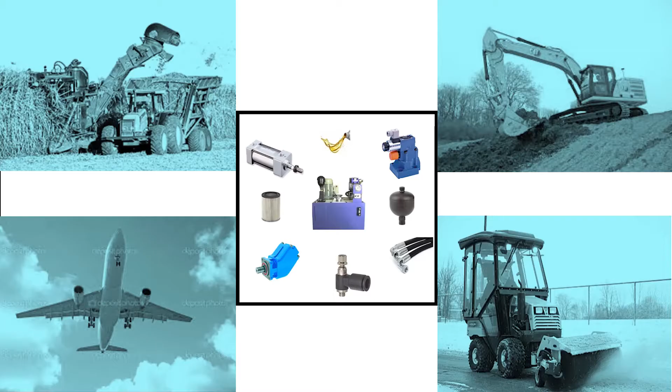Next we will see how the fluid is transported. In the previous topic, external meshing took place. Now we will see internal meshing, what is called the internal gear pump, commercially available in the market. Let's see how the fluid is sucked and transported to the hydraulic system through various valves. Again, inlet is there, outlet is there, some mating elements are there. Can you please see here how it is, what are those?

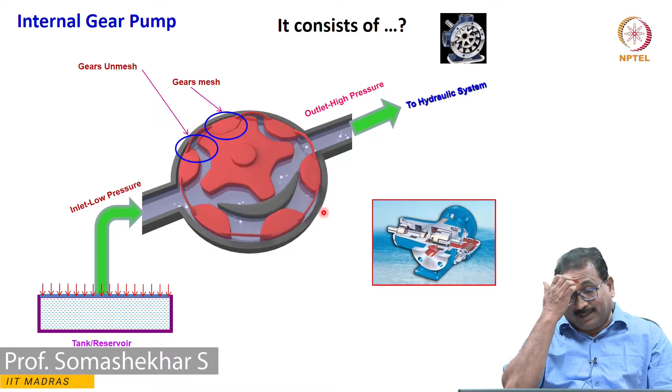Please carefully observe the inlet, outlet, and here I marked two gears. You will see some things very neatly. I will explain the constructional features of the internal gear pump. Can you think how many elements are here? Yes, as usual two gears are there in the housing, but they are meshing internally.

What are those elements? One pinion is there, you will see external teeth, the pinion gear, the small one here. Then it is a ring gear, the bigger one. Then here you will see one crescent shaped divider, some projections in the body housing, known as the crescent shaped divider, which separates the inlet and outlet.

Due to this crescent shape, the pinion and the ring gear are always offset. The axis of the pinion and the axis of the ring gear are not aligned. This is very important. The pinion gear is the driver which is connected to the shaft; the ring gear is only the driven gear.

Then, as usual, the housing. The pinion gear and ring gear are offset, and the crescent shaped divider divides the inlet and outlet, meaning it separates the inlet and outlet. All of these are enclosed in the housing.

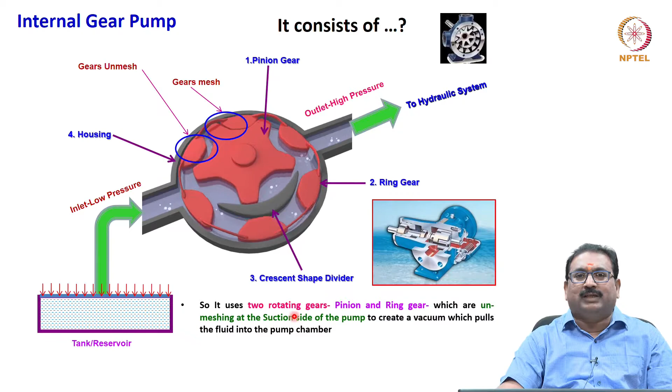So it uses two rotating gears, pinion and ring gear, which are unmeshing at the suction side. You will see here why this is suction. Here, friends, the gears are unmeshing, which creates a partial vacuum at the suction side of the pump, pulling fluid into the pumping chamber. Initially there is no fluid; when rotation starts, unmeshing occurs automatically and creates partial vacuum. Then due to delta P, the oil is sucked from the tank into the pump.

Once the fluid is caught, no need to worry. It automatically transports the fluid on either side of the crescent shaped divider. The space between the gear teeth transports the fluid on either side of the divider to the discharge side, and discharges it positively as the gears remesh.

You will see the meshing here; when it rotates again, it remeshes in this place. You will see remeshing take place, then unmeshing again. Always suction side then remeshing at discharge side, meaning increasing volume and decreasing volume. Observe this minutely; this is the principle of pumping.

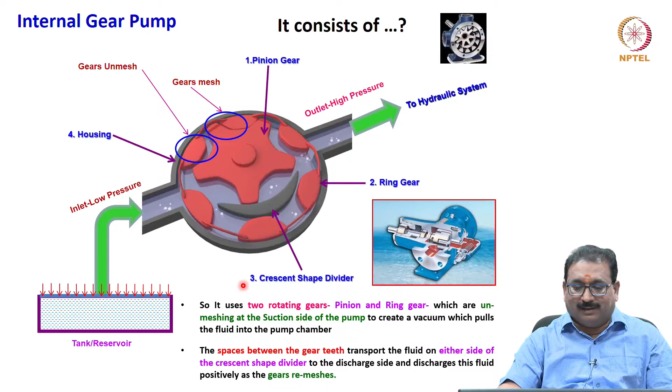Important features: very low noise level, primarily used in non-mobile hydraulics and in vehicles which operate in an enclosed space, like an electric forklift.

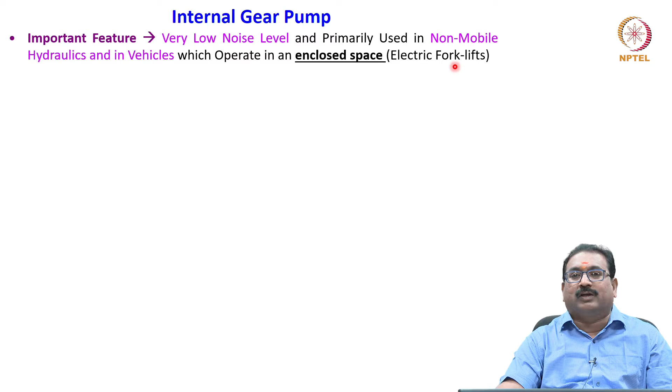It consists of, as shown in the sketch, a driver and driven gear, two gears which mesh internally, with inlet, outlet, and housing. It is a pinion, the very small one shown here, a regular spur gear with external teeth connected to the driver shaft.

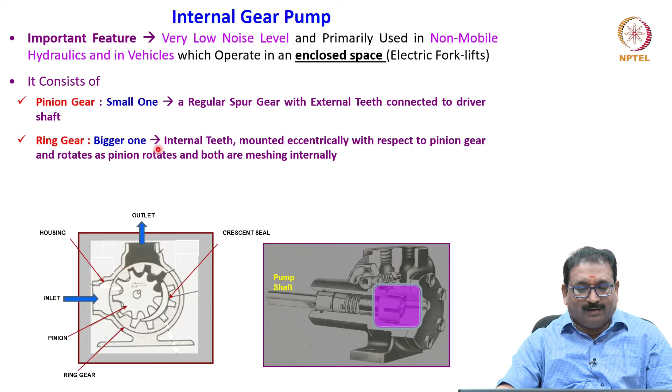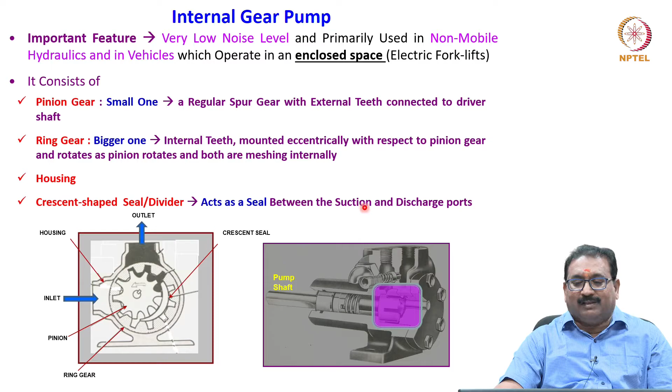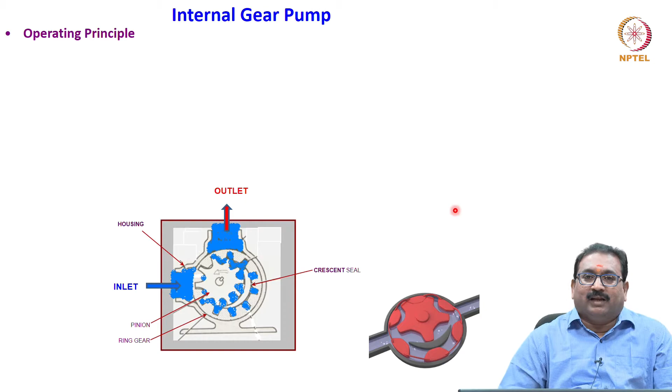Similarly, the ring gear, the bigger one, has internal teeth mounted eccentrically with respect to the pinion gear and rotates as the pinion rotates, both meshing internally. The housing and the crescent shaped seal or divider act as a seal between the suction and discharge ports. This is a simple construction: two gears meshing internally, mounted with an offset crescent shaped divider, and the housing. These are the very important elements in internal gear pumps.

Operating principle, as told before: as the teeth come out of mesh near the inlet port, increasing volume creates a vacuum, allowing atmospheric pressure to push fluid into the pump housing from the reservoir. It is then carried between the teeth and forced around both sides of the crescent seal. When the teeth mesh again, the fluid leaves through the discharge port.

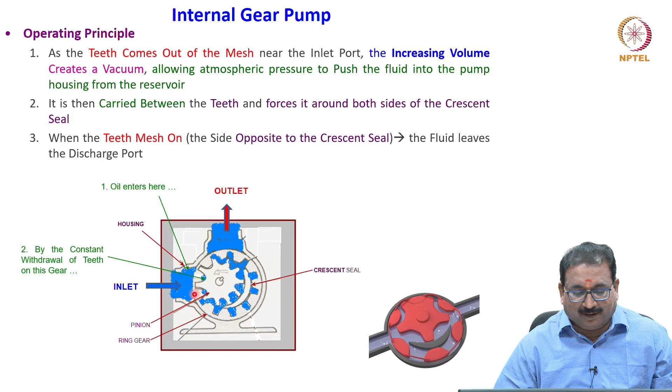So oil enters here, is carried in the pockets formed by the space between the teeth and the internal gear, and is discharged clearly through this outlet port.

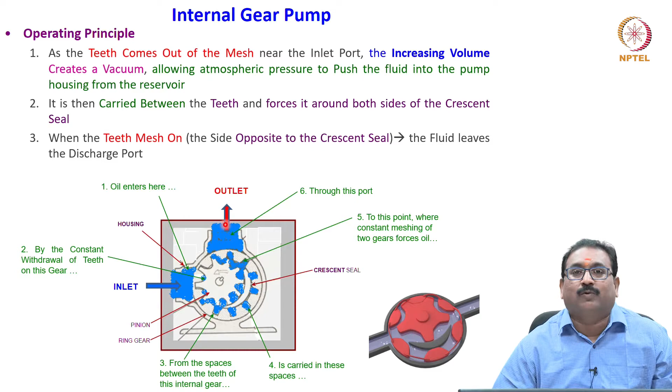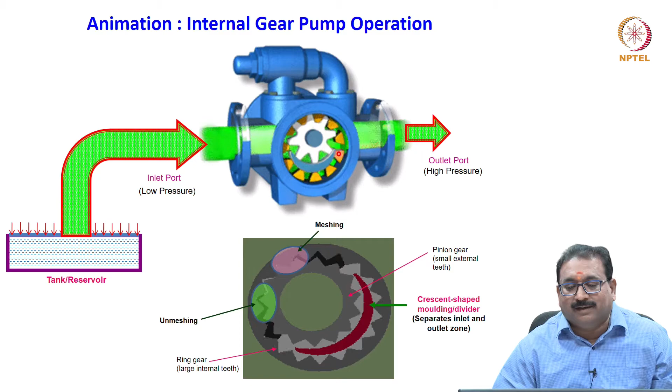You will see very clearly in the animation of the internal gear pump all the meshing and unmeshing as I have marked. The fluid is sucked here and discharged here. This is the crescent shaped divider, the pinion, and the yellow one is the ring gear, which has internal teeth; both are offset. See the crescent shaped divider: once the fluid is ejected, it will not come back, as it separates the inlet and outlet.

Now I will show you this variation in the pumping chamber with a simple schematic diagram. You will see here the ring gear is the big one, and the axis is marked here. This is the pinion gear, which has external teeth mounted eccentrically. The eccentricity is between the pinion and the ring gear. Then there is what you call a crescent shaped divider.

This will show you clearly the increasing volume and decreasing volume. That is why I have drawn here the variation in the pumping chamber, what happens in the pumping chamber. The pinion is connected to the motor shaft, that is why it is called the rotor. The outer part is the ring gear.

When this rotates, in the half revolution, I have marked the quadrant here, A, B, C. See this area, A, B, C half. You will see the area goes on increasing here. That is why it is always the suction side.

When it rotates another half, the volume decreases here. This is the discharge. The whole pump is designed for a certain delta P. The pump will withstand up to 120 bar capacity, coming from the load. Each pump is designed for a certain pressure.

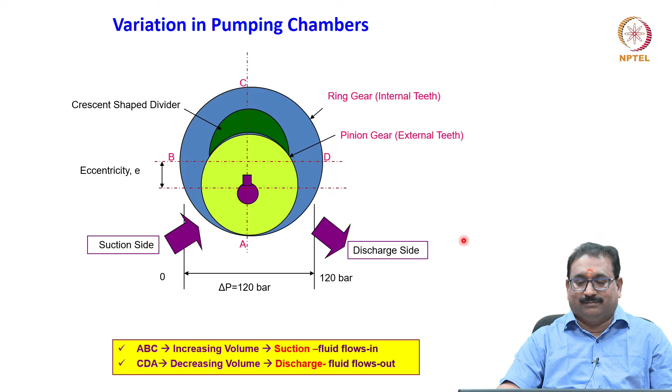Now a very important thing: serial switching of the internal gear pump is possible. As I told you in the previous slide, the pump is designed for a certain pressure, for example delta P is 120 bar. You can't use this pump beyond 120 bar, otherwise the pump elements will get destroyed, or the pump efficiency will go off with continuous usage.

So what is the beauty here in the internal gear pump? If you have 3-4 pumps of capacity 120 bar each, serial switching of the internal gear pump is possible. Then you can use the whole unit for higher pressure ratings, whatever required. You don't need to buy another pump of higher capacity. How do they do it? You will see here.

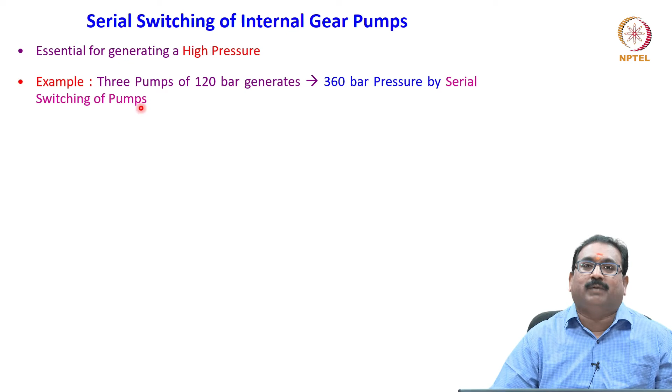Serial switching is possible for generating high pressure. Here I am showing you 3 pumps of 120 bar each, which generate 360 bar pressure by serial switching of the pumps. This is the beauty of internal gear pumps. You see 3 pumps, each having 120 bar capacity.

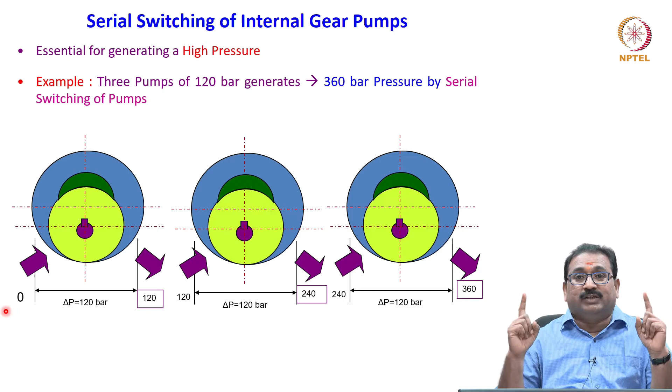What I am doing here is serially switching them, meaning the fluid is sucked, the outlet of one is connected to the inlet of the next, and so on. The whole unit withstands 120 plus 120 plus 120, meaning 360 bar capacity overall. Otherwise you would have to buy a 360 bar capacity pump. No need to worry, serial switching is possible. It's very, very simple.

Another thing I am showing you here is how the meshing takes place. You will see clearly in the figure. Now we are discussing the gear ring pump, or gerotor. Gerotor is a trade name, friends, it is nothing but 'generated rotor', the trade name for the gear ring pump.

Here you see it is internally meshing, but there is no crescent shaped divider in the gear ring pump. So where does the meshing take place? You will see how it is designed, the big one is the ring gear and the pinion. How many teeth are there? The pinion has one tooth less than the bigger ring gear, meaning the inner gear has one tooth less than the outer gear. Outer gear means the ring gear. That is the beauty here.

See this is a rotor and a driven gear. The rotor, having one tooth less, the pinion is having one tooth less than the driven gear. Again, it is a motor shaft, cut section model of the gerotor pump.

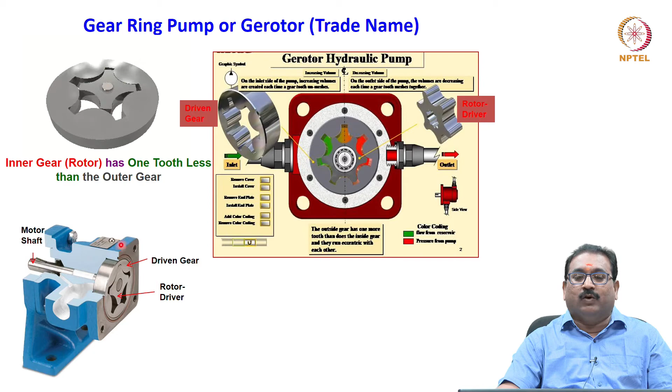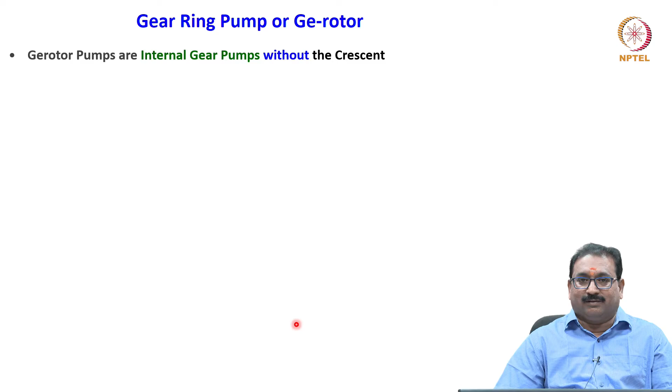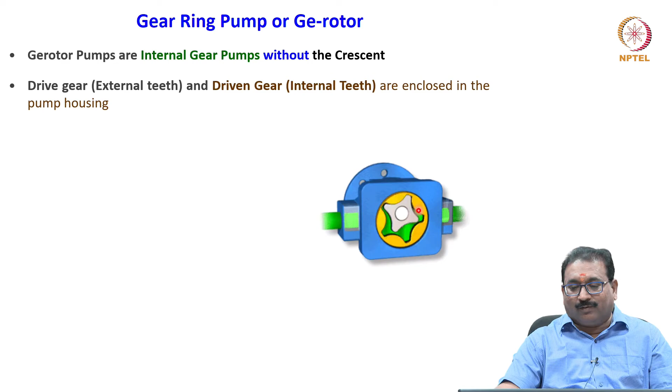What is this? Gerotor pumps are again internal gear pumps without the crescent shaped divider. The driver gear, meaning the external teeth, meaning the pinion, and a driven gear with internal teeth, what you will call the bigger gear, are enclosed in the pump housing. Please note, the driver gear has one tooth less than that of the driven gear, thus eliminating the crescent shaped divider as seen in the internal gear pump. In gerotor pump, number of teeth on the pinion is one tooth less than the ring gear.

So the tips of the driver gear and the driven gear make contact to seal the pumping chamber from each other, instead of using a crescent shaped divider. Due to this, the sealing is established between the tooth tip and the pumping chamber.

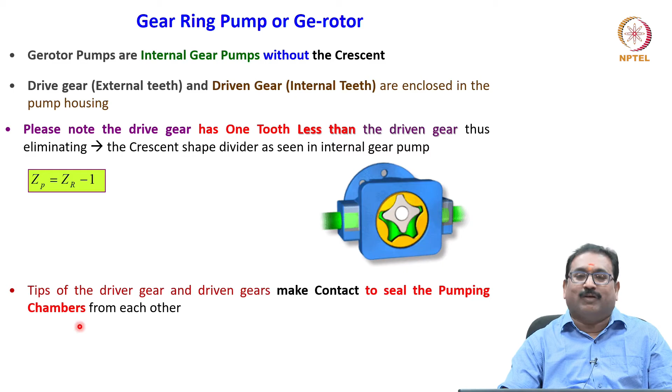Current research focus is on different profiles. People have started using different involute profiles, cycloidal profiles, epicycloidal profiles and hypocycloidal profiles in gerotor pumps, to make this popular. It has a wide number of applications in the aero industry as well as in manufacturing industry. People are trying different profiles as I have told you, and plenty of research papers are also available.

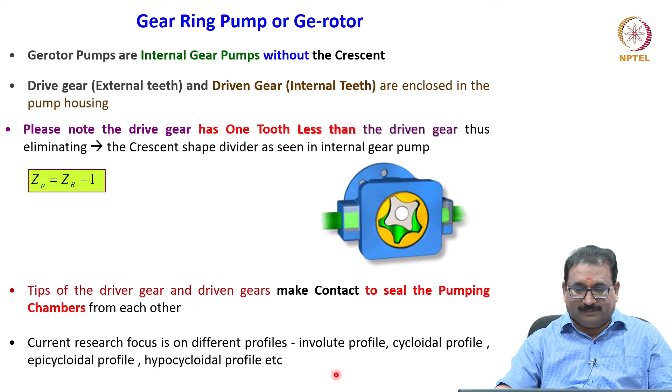Now we will see, friends, the last one in today's class is a screw pump. You may have seen a screw pump, or an Archimedes pump, at science exhibitions or many other places. What is this? You will see how it is. See here, what are the things there? Two screws inside the housing.

But you will see, friends, flow is transmitting axially along the screws. Now that is the beauty of screw pumps - fluid is transmitted axially. Again here you will see a two screw, or a three screw, or a mono screw. Mono screw means one screw in the barrel. People use various categories - single screw in a barrel, or a twin screw.

One is called the rotor, this is called the follower. Fluid is transmitted in all cases axially. These are the two screws. You will see here, friends, three screws - the first middle one is connected to the shaft, the other two are followers. You will see how the fluid is sucked and transmitted along the screw axially, and discharges.

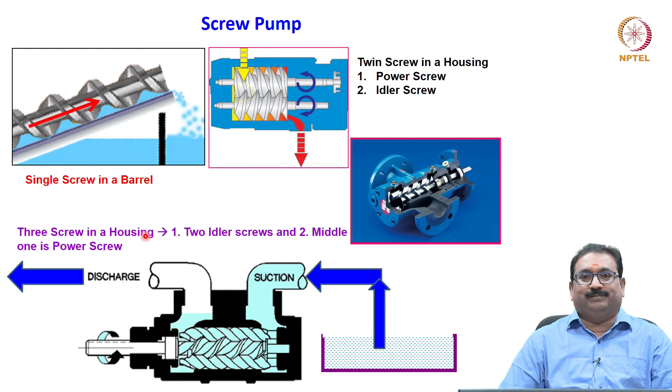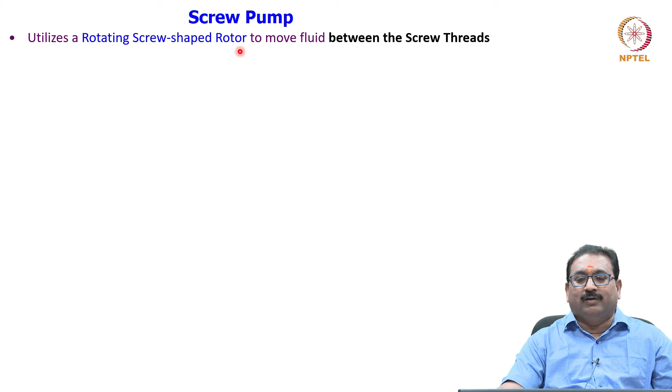Two idler screws and the middle one is a power screw. Power screw is one which is rotating using the electric motor shaft - both are coupled, that is why I am showing you here. Very simple, friends, this is the screw pump. It utilizes a rotating screw shaped rotor to move fluid between the screw threads. Transfer of fluid is along the screw axis, hence it is an axial flow positive displacement pump, delivering non-pulsating flow quietly and efficiently.

Various types exist - single screw, what I call mono screw pumps, two screw or twin screw, and three screw are also available commercially. An important feature of screw pumps is that they provide the highest flow rates of all positive displacement pumps. They can handle a wide range of liquids consistently at various flows and pressures.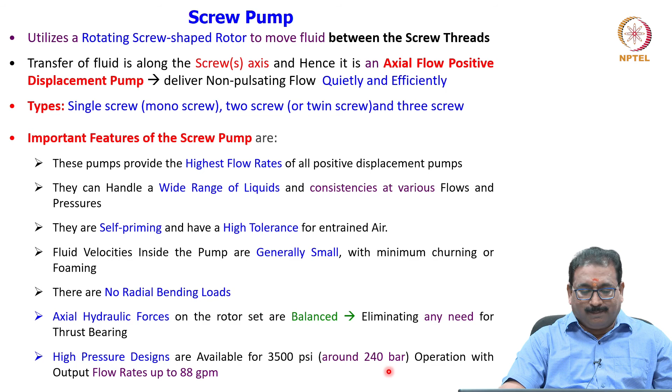They are self-priming and have a high tolerance for entrained air. Fluid velocity inside the pump is generally small, with minimum churning or foaming. There are no radial bending loads. Axial hydraulic forces on the rotor set are balanced, eliminating any need for thrust bearings. High pressure designs are available - around 240 bar operating pressure is possible, with very high flow rates of 88 gallons per minute.

Okay friends, today we have discussed in detail the following: introduction to hydraulic pumps, classifications, theoretical or ideal pump, pump efficiencies, and we focused more on gear pumps - external gear pump, lobe pump, internal gear pump, gerotor and screw pumps.